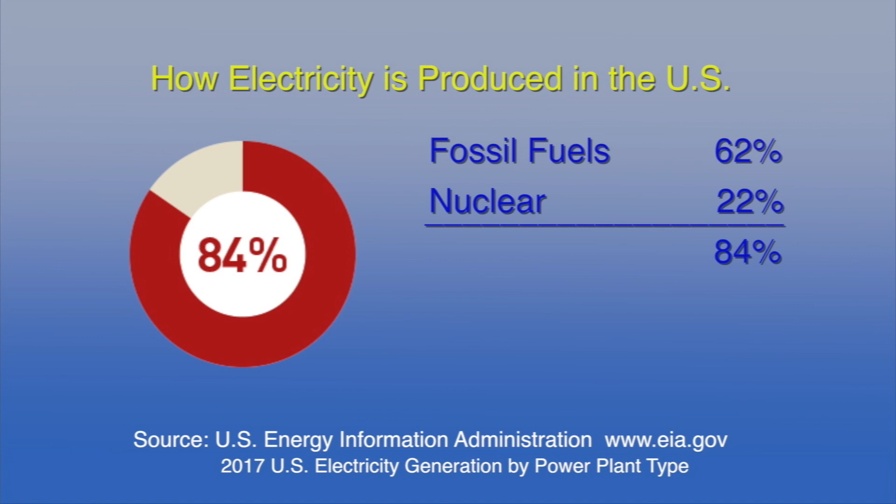According to the United States Energy Information Administration, in 2017 about 84% of the electricity generated by utility-sized power plants in the United States was done through the burning of fossil fuels or the use of nuclear energy.

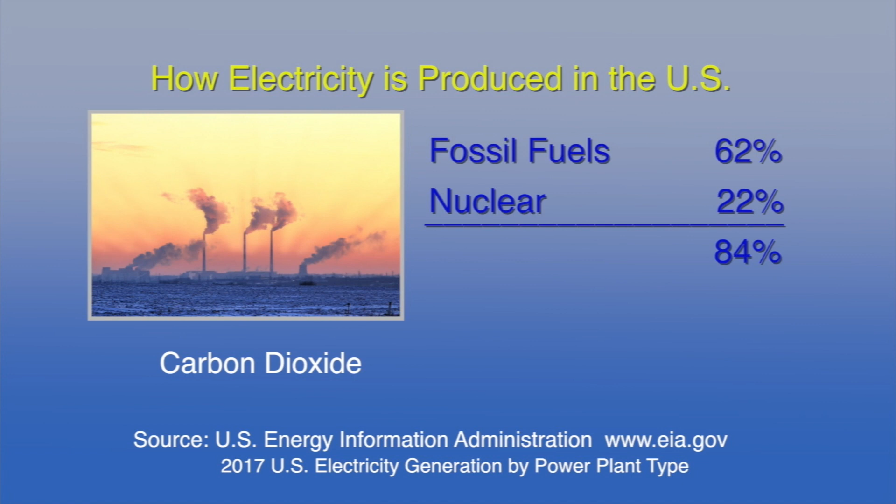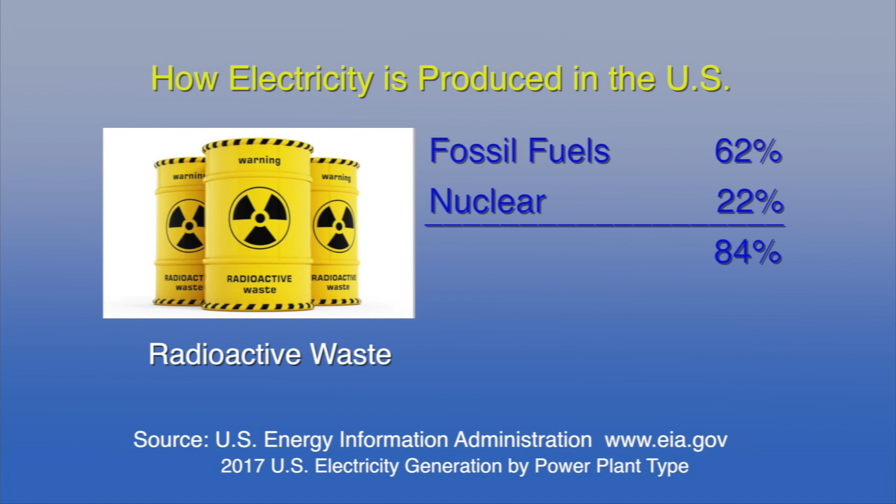Unfortunately, the first method produces high amounts of carbon dioxide, a known cause of global warming, as well as other pollutants. While nuclear power plants contribute nearly nothing to global warming, they do however create many tons of radioactive waste that must be kept contained in specialized storage areas.

In a world where it seems like the need for electricity is continually growing, we are still using methods of producing it that seem to be leading to the world's very destruction.

Even though some states, like California, have upped their reliance on renewable energy sources, nationwide only about 16% of our electricity is generated by alternative methods such as hydroelectric, wind, and solar that do not contribute to global warming.

Wouldn't it be great if we could come up with a new, non-polluting way to create substantially more electricity to add to this total? Nicer still, what if this new way to create electricity would cost about the same to produce as other green forms of electricity generation, or even less, without the need for any additional infrastructures that typically create their own issues of habitat destruction, or the expense of building more dams?

And how about if it could also create energy even when the sun wasn't shining, the wind wasn't blowing, and the lake was dry? You might be surprised to find out that there is such a method, using compressed air.

The same air that goes into powering the generators comes out the other end. No extra hydrocarbons, no acid rain, no radioactivity.

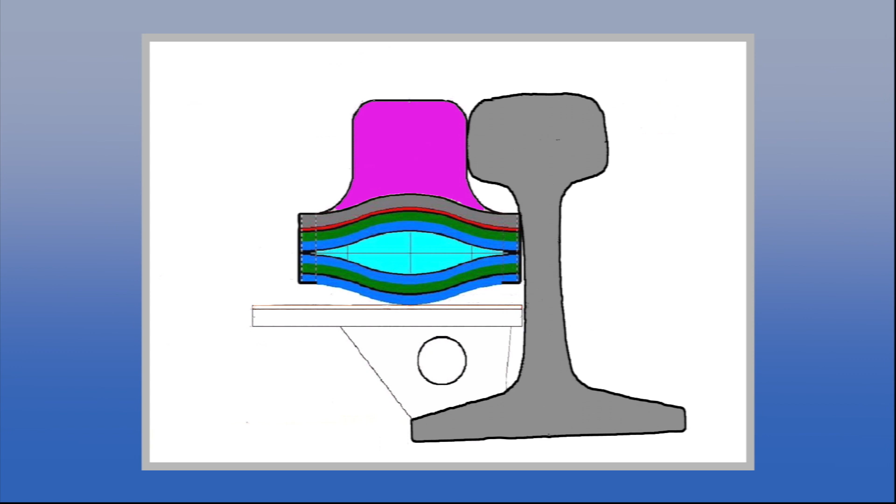Our new technology uses a series of 12-foot-long, patented air compression sections attached to the inside of each rail. These air compression sections are basically a durable type of spring-loaded hose, topped with a long-lasting tire tread-like surface for flexibility and quietness, along with a support structure that allows for the air compression section to be attached safely and easily to the railroad tracks.

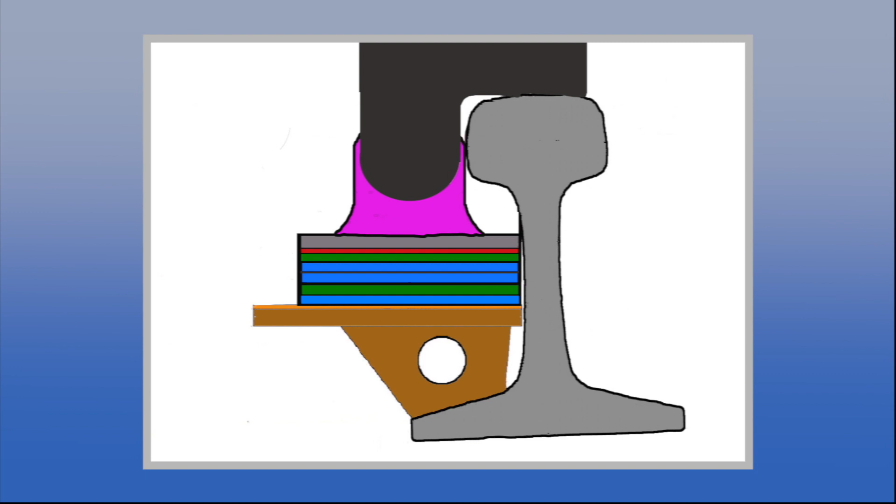As the train passes over each air compression section, the larger diameter inside portion of each train wheel presses down, acting like a rolling pin, squeezing the air in the hose along ahead of it until it comes to the end of the section and the air is shunted past a one-way valve. As soon as one set of train wheels has gone by, the spring-loaded hose recovers its shape and refills with air before the next set rolls over it.

After passing the one-way valve, the compressed air is fed into underground storage vaults that can be located alongside the railroad tracks or wherever is convenient. Eventually, the compressed air will be routed to a bank of pneumatic motor generator sets where it will be used to generate electricity. Let's see how this system might be used to furnish the electricity needs for a typical American city of 100,000 residents.

An average town of 100,000 residents would be comprised of around 40,000 households. In 2017, the average electricity consumption for a U.S. residential utility customer was around 10,000 kilowatt hours per household per year, or about 30 kilowatt hours per household per day. To supply 40,000 households in our model city with 30 kilowatt hours of electricity per day, we would need to produce an average of 1.2 million kilowatt hours per day.

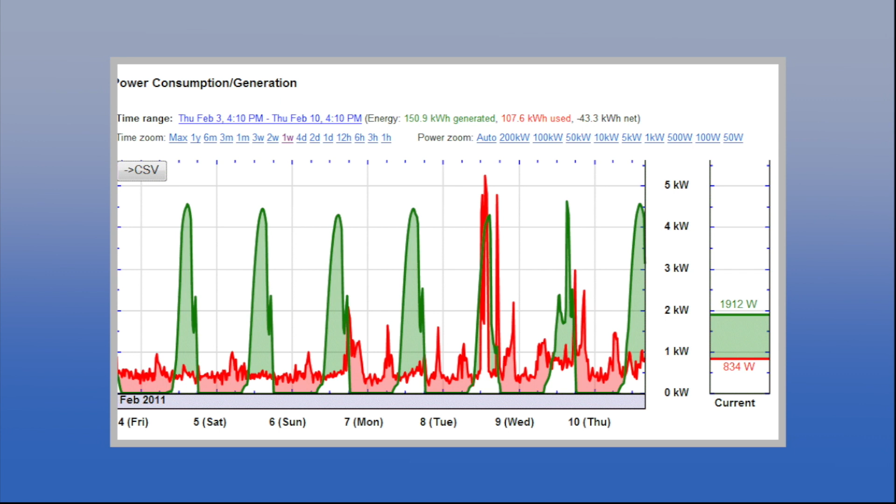These generators could be broken up into several smaller capacity power plants placed at different locations near the railroad line, or all of them could be housed in one building about the size of a football field.

On most mornings, only a few generator sets would need to be in operation, but as the city wakes up and the need for power increases, the generator sets can simply take in more compressed air to meet rising demand, similar to the way an automobile's cruise control adjusts fuel supply to the engine, responding to the ups and downs of the highway.

As the day progresses and more capacity is needed, additional generator sets can be brought online at the touch of a button, since the compressed air to run them will be instantly available from storage.

To supply that many generators with compressed air at a targeted mid-range of 330 pounds per square inch, we estimate that we would need to outfit around 27 miles of railroad track with our air compression technology. There would have to be at least 24 trains of 50 cars each passing over the tracks in every 24-hour period, or some combination equaling the same number of wheel sets.

You might be wondering how enough compressed air to supply the electricity needs of a city of 100,000 can be created without greatly adding to the amount of diesel fuel that the trains are forced to burn while passing over our air compression sections.

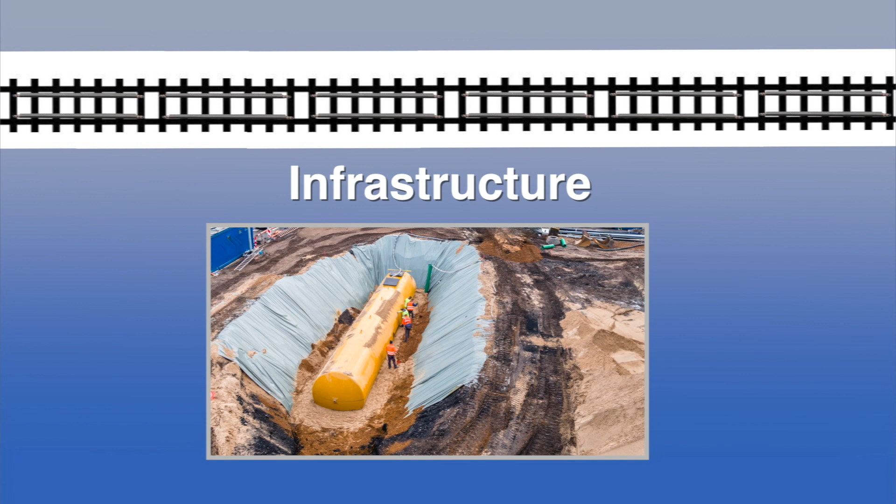In terms of infrastructure, one of the biggest costs has already been solved, simply by the current presence of railroad lines connecting just about every urban area to each other in the United States and the world. The other big infrastructure cost would have to do with the storage of compressed air. To meet the possible peak demands of a city of 100,000 people, plus have enough excess capacity to keep electricity flowing for 3 extra days if the train stopped running, we would need to build 2 storage vaults 50 yards wide by 25 feet deep by 6 miles long. This, of course, would be a huge undertaking.

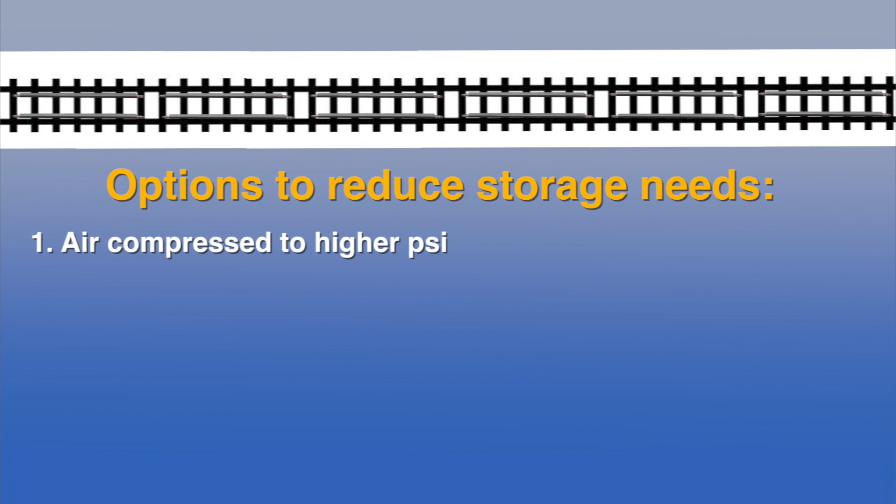These storage vaults could be made smaller if one or a combination of the following options were put into place: the air was compressed to an even higher PSI; a way to store the air deep underground in unused wells or caverns could be made available; a certain portion of the compressed air were used to generate excess electricity captured by some alternative storage medium such as lithium batteries; the need for excess compressed air storage was lessened from 3 days to a lower number; or finally, if the system was not expected to supply the entire needs of the city during peak use hours, but was rather used as a main supply for non-peak hours.

One nice thing about this new method for creating electricity is that the additional infrastructure will not create a massive eyesore on the visual environment. We wouldn't have to build large arrays to catch light or wind, or new dams that fill up our scenic canyons. The equipment seen above ground will pretty much look like the railroad tracks you see already, and the storage areas for the compressed air can be buried underground so the land above can still be used for farming or other uses.

It is our estimate that railroad cogenerated power could be produced for around 4 cents per kilowatt hour, which is in line with the costs incurred by other producers of electricity. At present, electricity is sold for between 6 cents and 12 cents per kilowatt hour, depending on the season, time of day, and buyer. Even taking the lowest sales price of 6 cents per kilowatt hour, our plant serving our hypothetical city would make a profit of $24,000 per day, or almost $9 million per year.